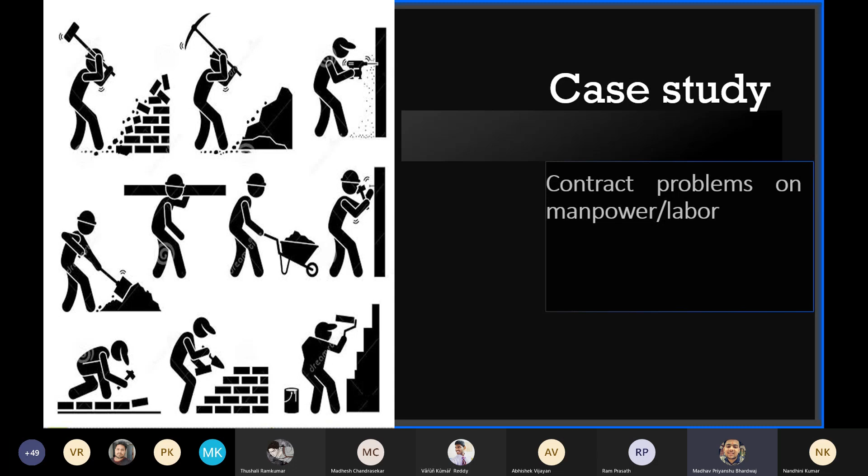The construction industry is the second largest absorber of the bulk of the Indian labor force in the unorganized sector. Construction is one of the principal industries in all countries. Almost all development projects and programs in health, education, food production, and transport require construction work. It was projected by CIA in 2012 that there are 487 million workers worldwide, the second largest after China, with 111 million construction workers, and the majority belong to developing economies like India. This is because employment intensity is much higher in lower income countries than higher income ones.

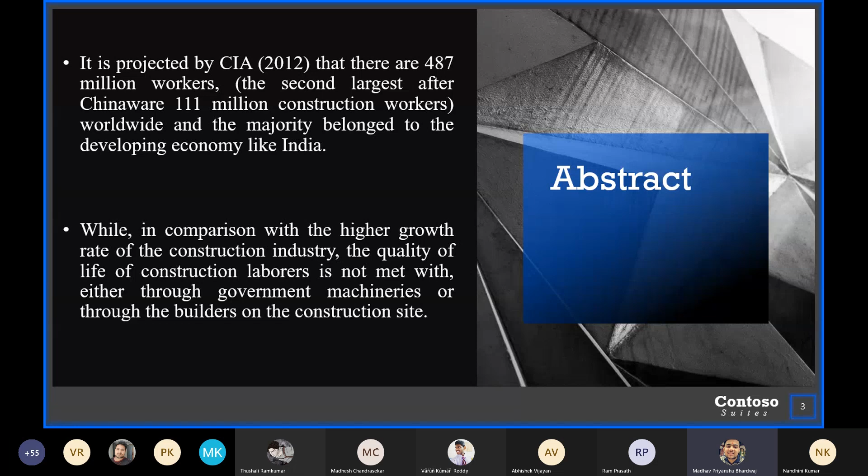In many urban areas and towns in India, an increasing number of workers have taken up construction work as a means of immediate employment, since it assures at least day-to-day sustenance to their 3 to 4 member family's life. While in comparison with the higher growth rate of the construction industry, the quality of life of construction laborers is not met with either through government machineries or through the builders of the construction site.

The present study reveals the physical problems, psychological problems, economical, educational level, work environment, habits, and welfare measures of the construction workers. The outcome of this research will be useful for social workers, general public, government, NGOs, and policymakers. The pathetic condition is that migrated construction workers are constantly exposed to accidents, ill health, extreme levels of harassment, and poor quality of work life.

A study was conducted in Pune city of Maharashtra during the 2010 to 2011 period. The researcher and associates met with construction industry laborers in 82 construction sites in the vicinity of around 70 kilometers of Pune city. The study started with a case study of a male worker on a construction site, and in order to get appropriate support to the qualitative research, a structured questionnaire was also implemented, especially in an informal way. The findings of the case study and the survey questionnaire exactly showed and replicated, exposing the deplorable condition of workers in the construction industry.

This qualitative research paper provides insight into the plight of construction laborers in general, and action to be taken by the authorities, specifically considering the outrageous state of common workers. Now I would like to call upon my friend Tharun to introduce today's topic.

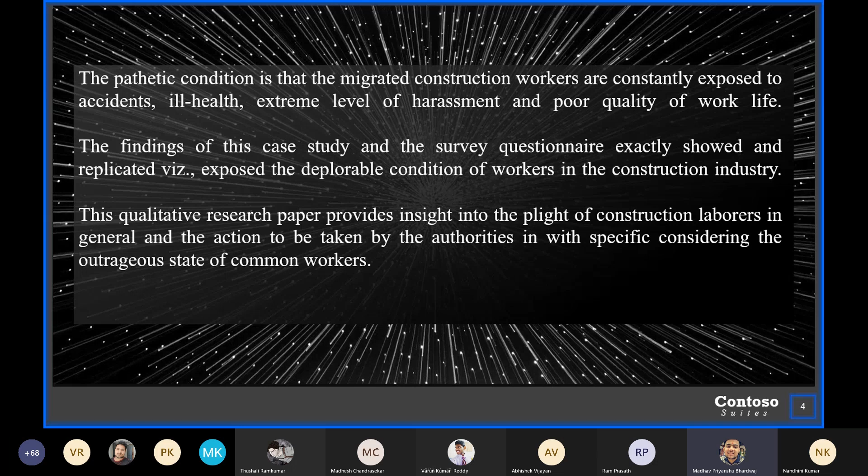Good morning all. Ma'am, am I audible? You're audible. Okay, you're audible, you can start.

Now I am going to give an introduction on this topic. We all know construction worker means workers involved in the process of construction; different groups of workers do different types of work at the construction site. Construction workers in our country are still unorganized, socially, economically, educationally backward, and underemployed, as Madhav said.

These people travel from one area to another along with their families in search of daily jobs. Most of the laborers migrating to big cities have to face a number of problems because of their inexperience and lack of skill, and lack of education makes their choice very limited. They become easy victims of exploitation and have to work for day-to-day sustenance.

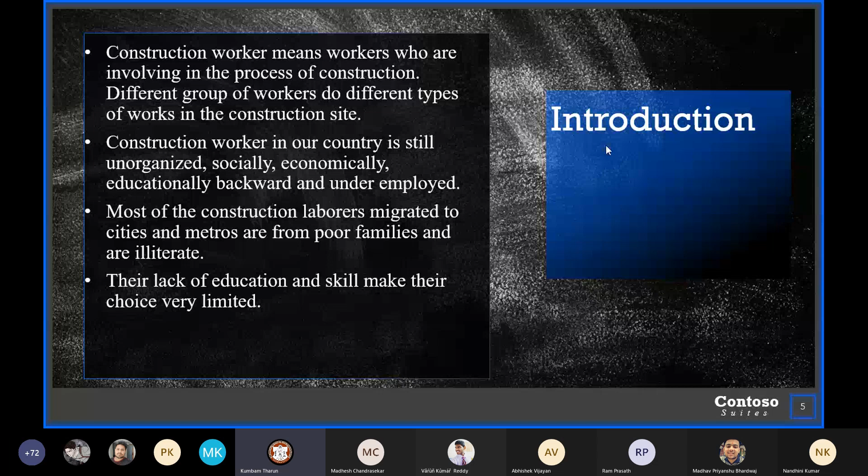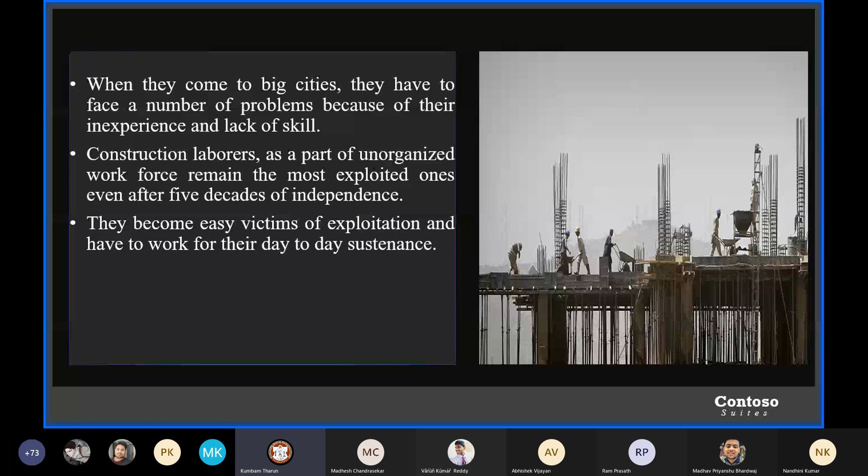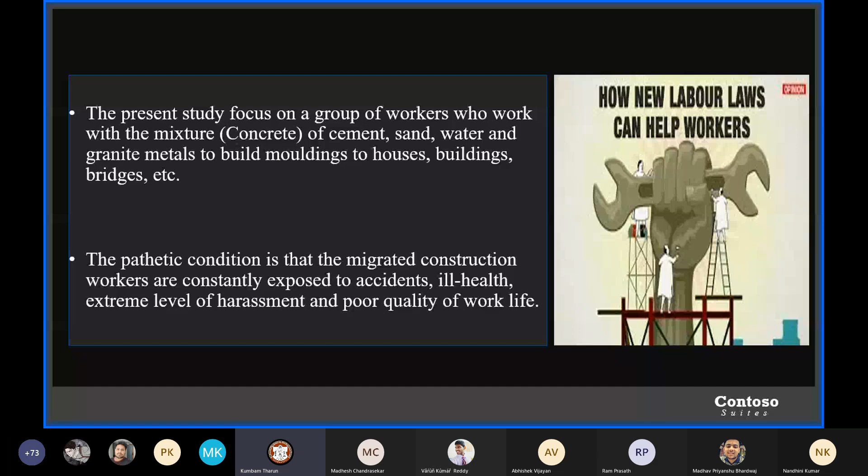The present study focuses on a group of workers who work with a mixture of cement, sand, water, and granite metals to build moldings for houses, bridges, etc. This category of construction worker suffers more than other construction workers because there is no regulated time for work. Every day the workplace is changing, with irregular leisure time, insufficient employment, unregulated wages, and some are exposed to accidents and ill health due to poor quality of work life.

At present, there are more than 20 million construction workers in India. Cities like Delhi alone have around more than 600,000 of them. Apart from other metropolitan cities, lack of employment opportunity has drawn a large number of workers into this sector, as part of the unorganized workforce that remains the most exploited ones even after 5 decades of independence.

In the recent past, the trend shows that big cities have become the center to recruit casual labor as construction laborers for sites and urban areas. This seeks to look at the employment of labor in the construction industry in less developed countries from these two perspectives. A review of literature reveals that this is now the predominant form of employment in the construction industry of developing countries. Now Padmasri will continue on the review of literature.

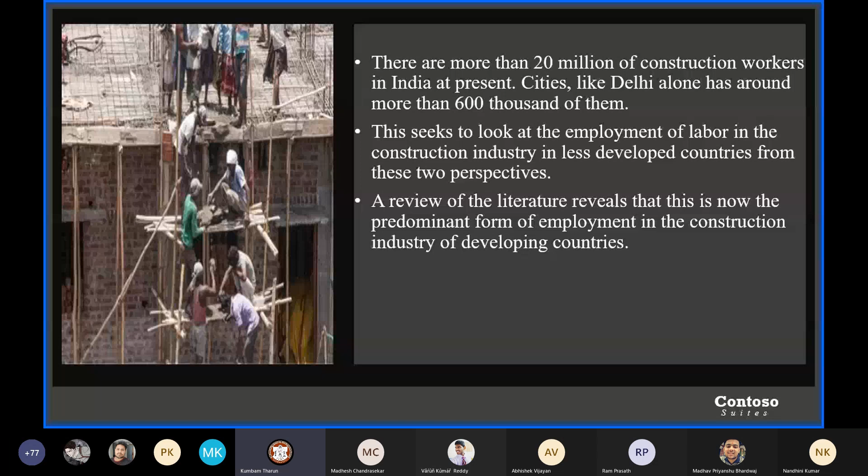Now I am going to present the review of literature. Construction is one of the principal industries in all countries, which has its own unique characteristics and contributes to overall development progress.

All development projects and programs in the field of education, health, food production, etc. require construction work. Construction workers are broadly classified as skilled and unskilled workers. Unstable employment or earnings and shifting of workplaces are the basic problems of construction workers.

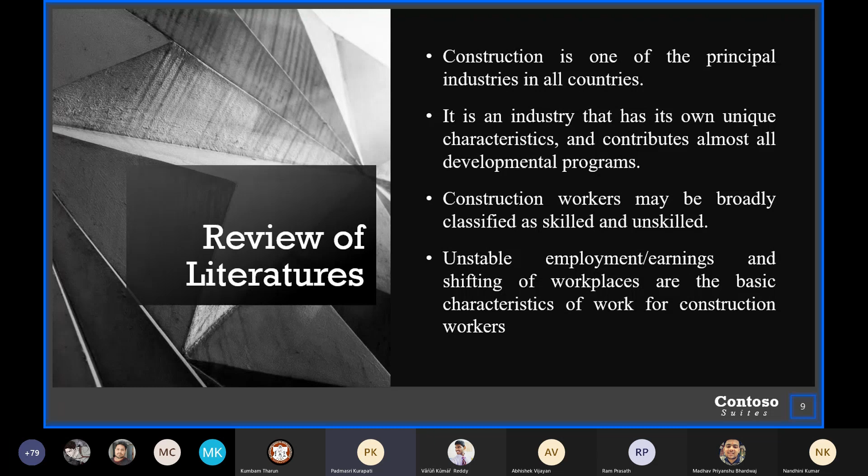Many surveys reveal that female workers do in general get minimum wages. Skilled workers secure jobs directly from employers, but unskilled workers are engaged through intermediaries who introduce them to contractors on a commission basis. The payment of wages is also routed through the intermediaries, who usually enroll workers by offering loans. These loans are then recovered by manipulating the wages of the workers, with the result that the worker hardly gets out of the clutches of the intermediaries.

Construction workers constitute the second largest category of workers in the unorganized sector. There are more than 17 million building and other construction workers in India as per estimates of the National Sample Survey. A large number of multinational and local companies employ lakhs of workers in construction and other activities like whitewashing, painting, plumbing, and fixing electric fixtures.

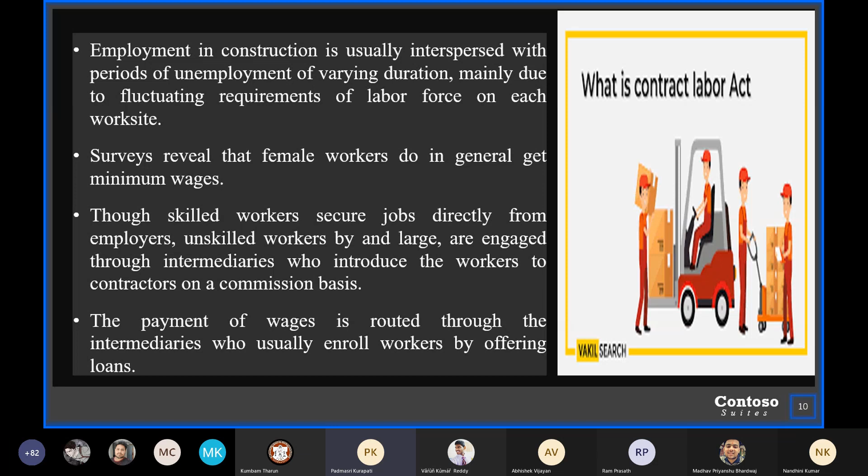Construction workers come under the classification of the unorganized sector. Unorganized sector workers suffer from cycles of excessive seasonality of employment, no formal employee-employer relationship, and lack of social security protection. Several legislations are directly or indirectly applicable to workers in the unorganized sector. The government has launched schemes for people living below or marginally above the poverty line, which include workers in the unorganized sector.

The living conditions of construction workers in our country are poor and inhuman. They live in groups and their houses are constructed with scrap material from the construction site. There is no proper arrangement for waste disposal or sewage supply, causing environmental pollution, and there is unavailability of health, medical, and educational institutions, and lack of good quality food and nutrition.

These are the problems faced by construction workers. Daily wages differ according to the status of the worker and work efficiency, and are highly associated with skill status. The per day net average earning of construction workers is very minimal.

Majority of the workers are migratory in nature and have to depend on labor agents to confirm job availability. Some labor laws introduced in the construction industry include the Contract Labor Act 1970, Interstate Migrant Labor Act 1979, Building and Construction Workers Act 1996, and Building and Other Construction Workers Welfare Cess Act 1996. These are about regulation and protection of workers.

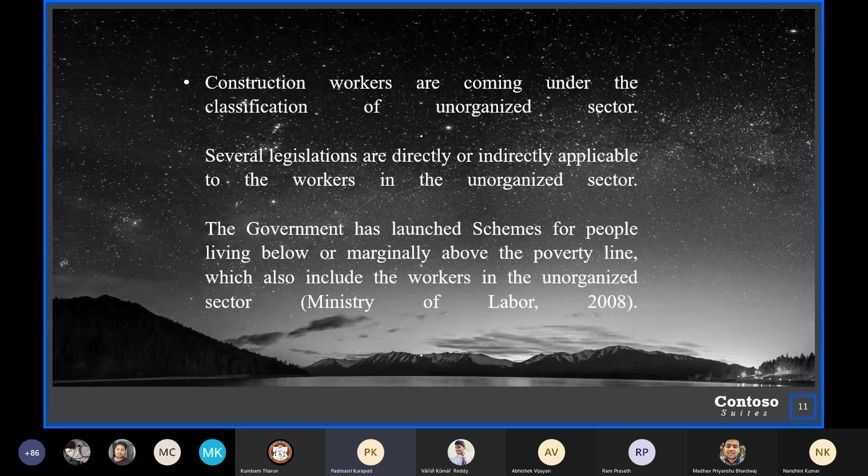Though construction workers have been given a lot of protection rights, in real life they are facing many difficulties to meet their basic needs. Now I hand over the presentation to Lokesh, my teammate.

Hello, am I audible? Hello. Yes, you're audible. Yeah, you're audible.

Hi everyone, I am Lokesh, roll number 67, and I am here to discuss the objective of this study. Our general objective is to study the problems of construction workers at Tirupattur, and the specific objectives are to study the physical, psychological, and economic problems of construction workers.

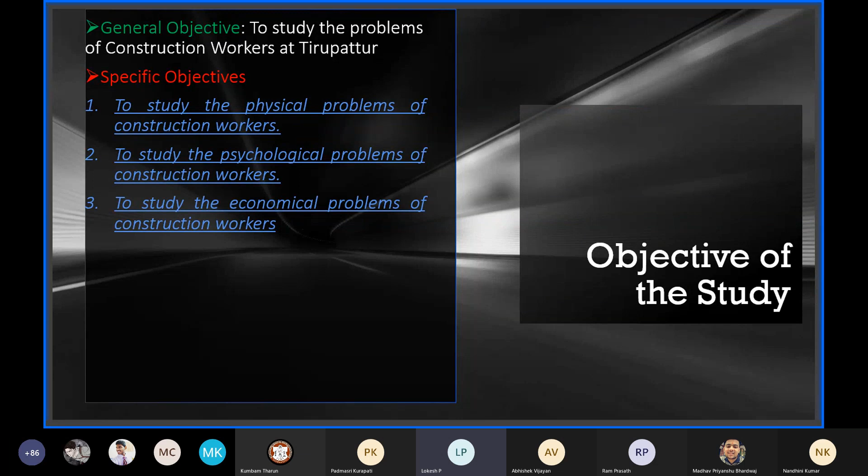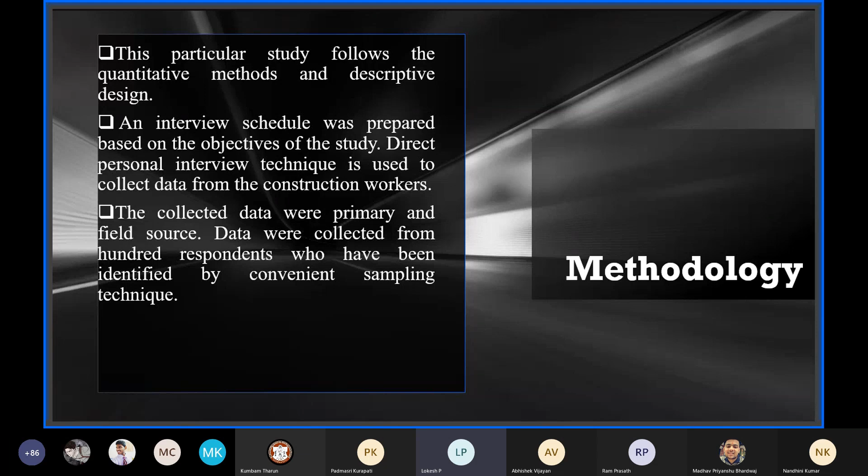Next slide. Here we have the methodology used to find the problems. This study follows quantitative methods and a descriptive design, with an interview schedule based on the objective of the study. Direct personal interview technique is used to collect data from the workers. The collected data were from primary and field sources. The data were collected from 100 respondents identified by a convenient sampling technique.

Next slide. And here we have the main findings. The construction industry is not providing basic facilities and safety measures to workers on site. As mentioned previously by Tharun in the introduction, 70% of the construction workers are living at town, and 82% of the construction workers get employment 2 to 4 days in a week.

The average minimum working hours in a day is 4.91 hours, and the maximum working hour in a day is 11.12 hours. 28% of construction workers get less than half an hour for rest during work, which includes lunch time also. 62% of workers never get lunch during work, but they are paid around rupees 50 to 60 for lunch, which is added to their wage.

74% of the construction workers are affected physically due to the nature of the work. Among them, 60% suffer due to body pain, 46% due to chest pain, 32% due to injury, 28% due to eye problems, and 18% due to skin problems.

52% of the construction workers have unfavorable habits such as drinking 26%, smoking 32%, pan consuming 12%, tobacco consuming 10%, and betel leaves chewing 4%.

86% of the population is suffering from psychological problems due to the nature of the work: lack of workability 54%, height of the workplace 40%, change of work time every day 30%, change of workplace every day 26%, lack of toilet facility 6%, work under compulsion 18%, lack of transport facility 10%.

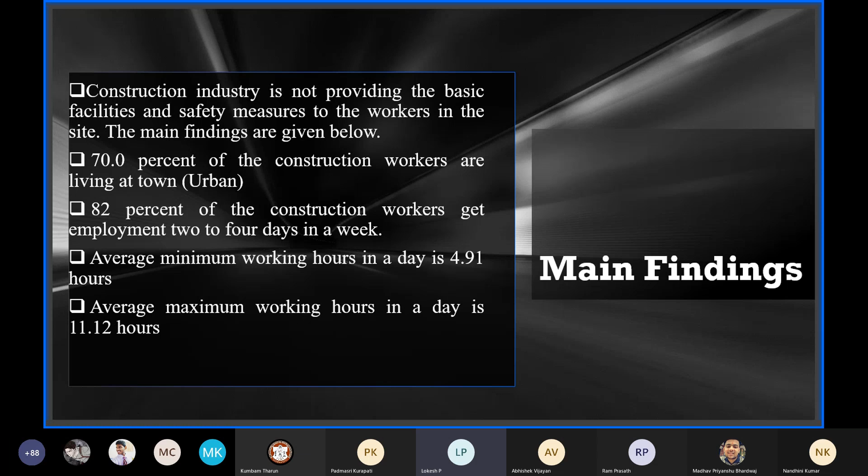42% of the workers are living in hut houses. The average minimum wage of the worker is rupees 145 only, and the average maximum wage of the worker is 250.

64% of the workers have no saving habits. 84% of the workers have loans, of which 80% have loans from the private sector. 44% of the workers have taken loans to meet the daily needs of the family, and 60% of the workers pay more than rupees 8 as interest for their loan per month.

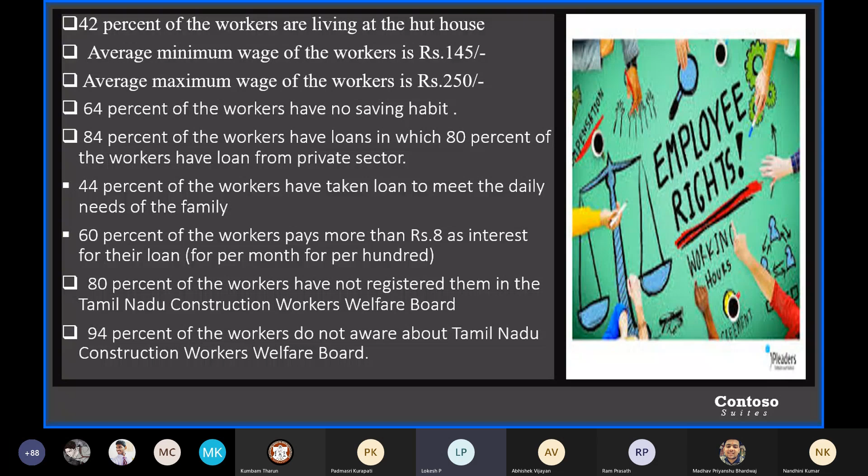80% of the workers have not registered in the Tamil Nadu Construction Workers Welfare Board, and 94% of the workers are not aware about the Tamil Nadu Construction Workers Welfare. That's all my part. Now my friends will conclude this.

Hello, am I audible? Hello? Hello? Am I audible? Yes bro, hello, am I audible? Yeah, you're audible. Yeah Prince, you're audible, you can start it.

As my friends have told before, the objective of this quantitative research is to explore the problems of construction laborers in India, constituting an important segment of the overall service industry, 7% of total GDP, and recording an annual growth of over 10% over the last 5 years.

The construction industry is one of the biggest employers of labor in India. While the condition of workers in the construction industry is very much deplorable, neither the law nor the contractors are showing mercy to this socially and economically poor segment of the population.

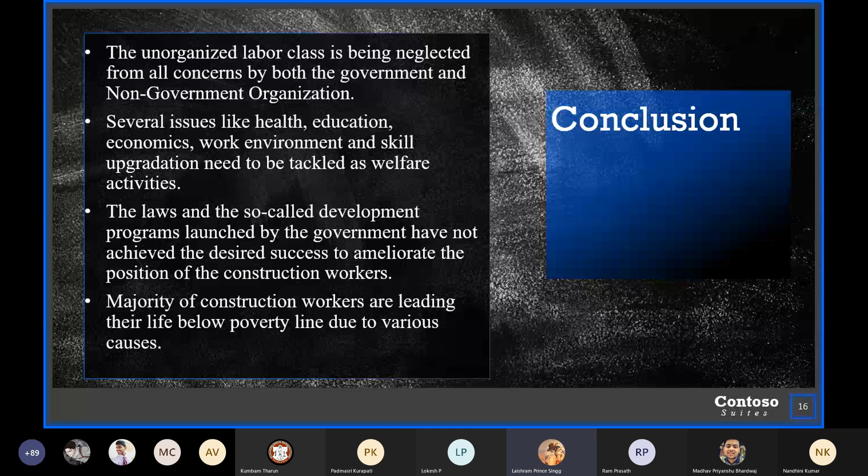The majority of construction workers are leading their lives below the poverty line due to various causes. The struggle for better wages and better working conditions cannot yield results only by formation of trade unions or cooperatives. Thus, a viable and workable solution must be evolved.

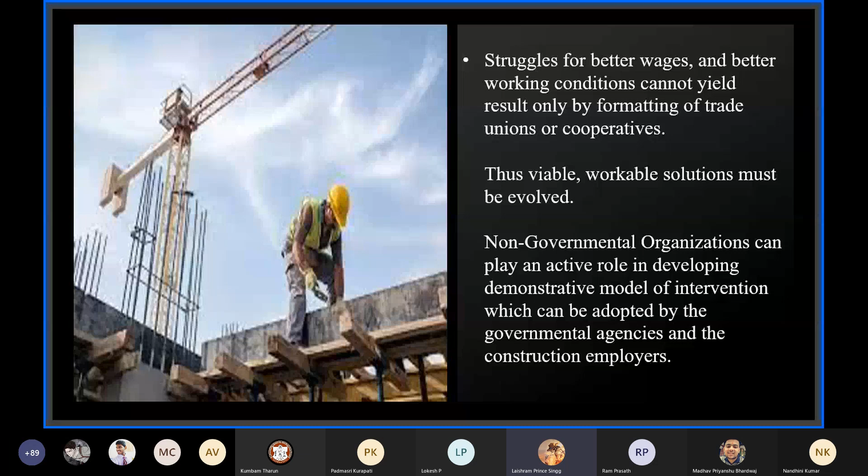Non-governmental organizations can play an important role in developing a demonstrative model of intervention which can be adopted by government agencies and the construction employers. With this, we are winding up our presentation, and given below is the reference we took during the case studies. Thank you, everyone.

Okay, thank you Team 13 members. This was a case study on construction laborers where you have discussed the problems they are facing in day-to-day life financially, and the issues they are facing in the construction sectors.

Yeah, this is sufficient for the case study. We won't be able to put so much because as it comes under case study, you have to take a journal, either a journal or literature or any textbooks, and just mention what issues they are facing and why. That you have discussed very well. Very good presentation overall, thank you.

Thank you. Yeah, thank you. Students, do you have any doubts on this topic? Case study on construction laborers or employees. Do you have any doubts?

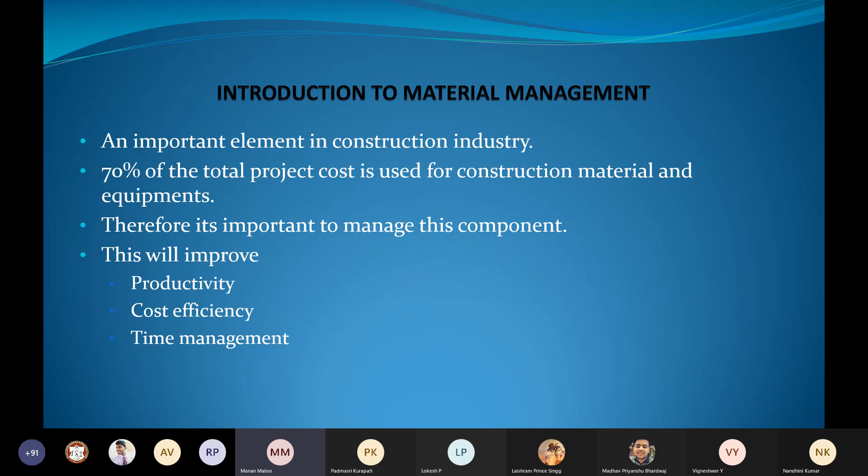Before we directly jump to our case study, it's better to first understand about the material and its management and its importance.

For managing a productive and cost efficient site, efficient material management is essential. Research has shown that construction material and equipment may constitute more than 70% of the total cost for a typical construction project. Therefore, management of this single largest component can improve the productivity and cost efficiency of a project and also help ensure its timely completion. One of the major problems in delaying construction projects is poor material and equipment management.

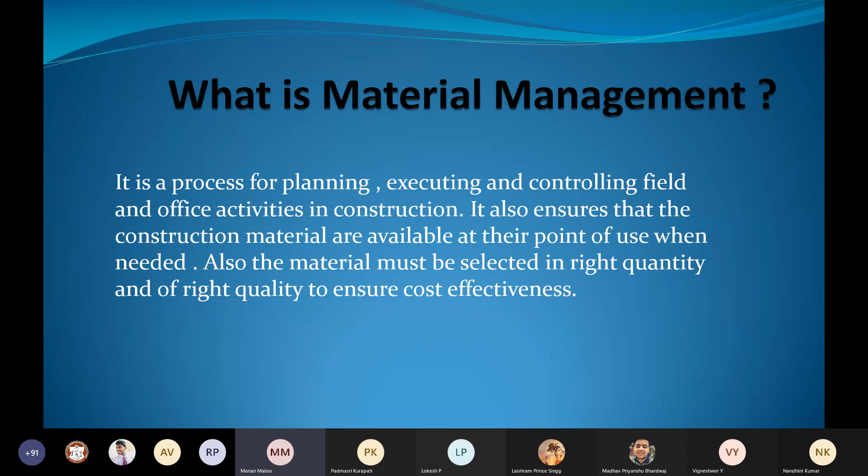So here comes the important question: what is material management? Material management is a process for planning, executing, and controlling field and office activities in construction site. The main goal of material management is to ensure construction materials are available at the point of use when needed. The material management system ensures the right quality and quantity of material are appropriately selected, purchased, and delivered on site in a timely manner, and are obtained at a reasonable cost, and most importantly are available at the point of use when needed.

Components of material management are material estimating, budgeting, and planning. It is important to plan activity so that it is easy to estimate the amount of material, and as a result an approximate budget can be prepared and further planning can be done.

Scheduling, purchasing, and procurement. After estimating and planning, it is important to schedule the process of construction so that the schedule of purchasing of material can be prepared, because without a proper purchasing schedule, it may happen that we purchase material that will not come into use right away. This creates a problem of storage, and due to insufficient storage, some material left in open space may be stolen or may become useless or get damaged due to rain or other natural reasons.

Receiving and inspection. At the time of purchasing material, it must be inspected for proper quality, and also at the time of receiving, it must be inspected again for proper quality and quantity, since quality of the material determines the quality of structure.

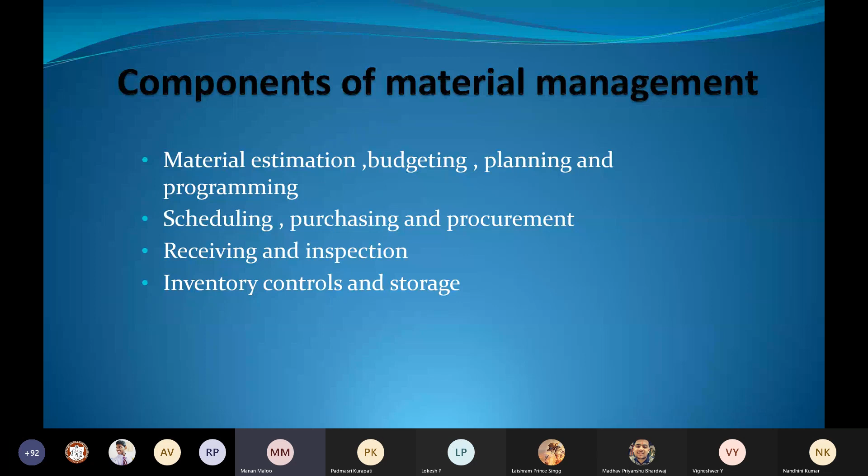Good morning, all. I will be discussing a case study on the flyover at Nashik on NH3.

This is an example of a lump sum contract. The work has been awarded to L&T, and the agreement is signed with L&T and PNG Tollway on 8 July 2009. The construction period is around 30 months. The project involves construction of a 5.5 km long, 4-lane flyover. This is India's first externally prestressed segmental box girder. It consists of 172 pillars with 12 segments each, which sums up to a total of 2064 segments. The cost is 940 crores and the expected lifetime is up to 100 years.

Problems faced and the need to construct: higher rate of accidents, high traffic problems at major intersections such as Dwarka and Mumbai, to reduce the time for vehicles passing over the flyover.

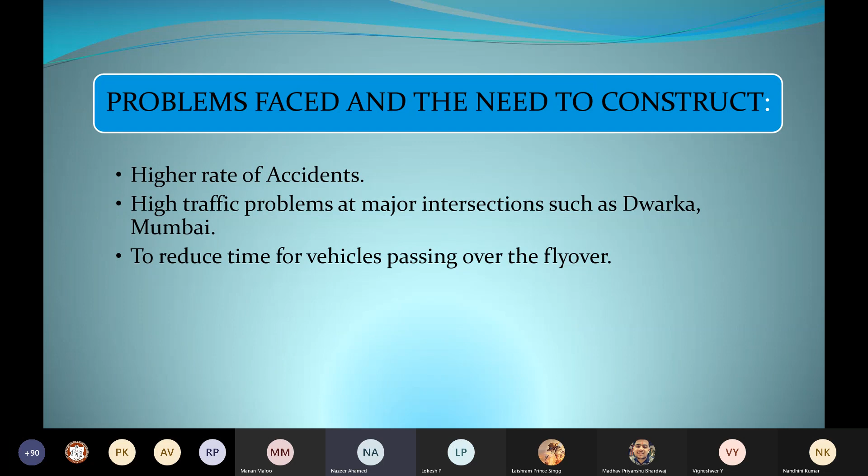Materials: foundation, piers, and segments. The concrete used is M35 grade and the concreting work is done by the time method. For foundation, the selection of type of foundation depends on the standard penetration number, following the standard penetration test as per the contract. Open foundation and pile foundation are used. If the span is greater than 50, open foundation is used; otherwise, if it is less, pile foundation is used.

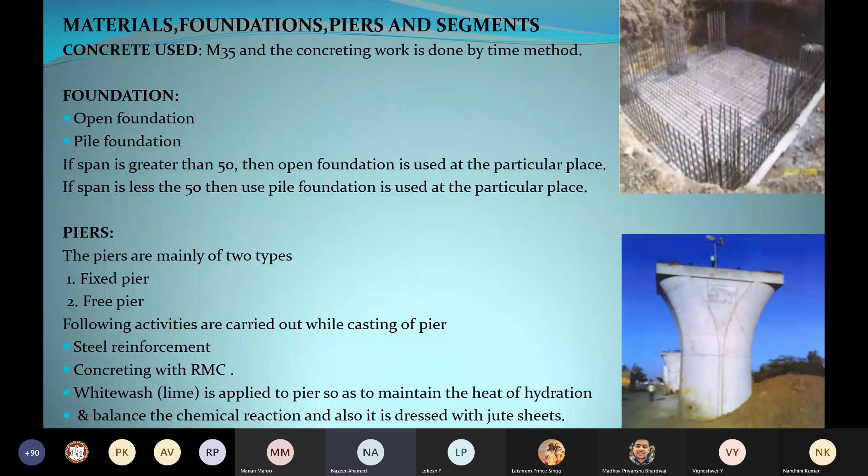Following activities are carried out while casting a pier: steel reinforcement, concreting with RMC. Whitewash is applied to piers to maintain the heat of hydration and balance the chemical reactions, and it is also covered with jute sheets.

According to the contract, trees should be planted when they are cut. But as usual, many trees were cut during the project and no records of planting were found. So the project cost went from 940 crores to over 1000 crores.

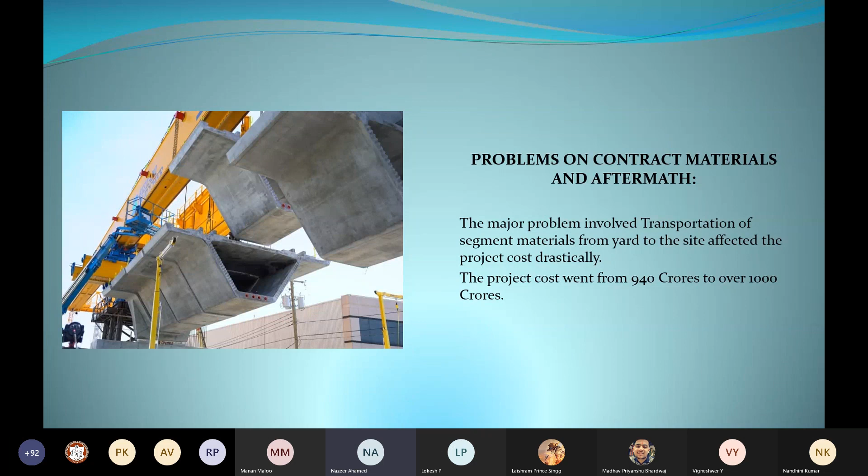Thank you. Next, Madhesh will continue on a case study of Nairobi, Kenya.

Hello all. I'm going to tell about a case study on contract problems and materials at Nairobi in Kenya.

The major problems are availability of materials, wastage of materials, quality and surplus of materials. The first is availability of materials. Materials availability was investigated, looking at storage problems, work being delayed, suspended, stopped, or working time extended due to shortage of materials or emergency purchase of materials. These are presented in the following tables.

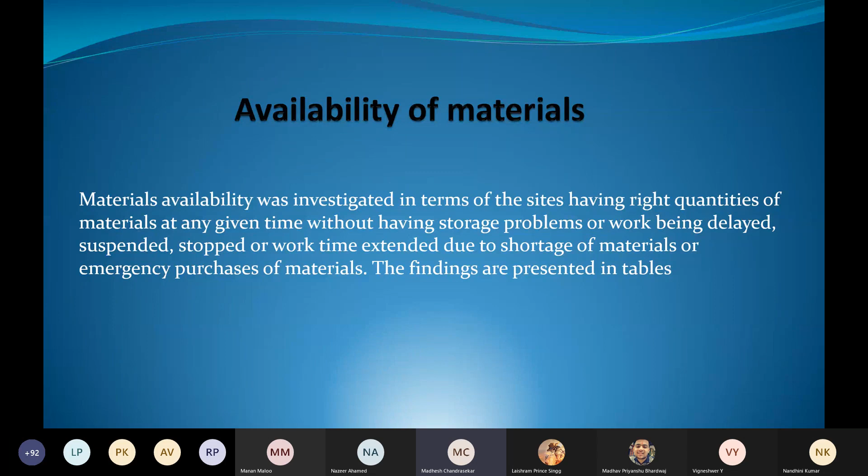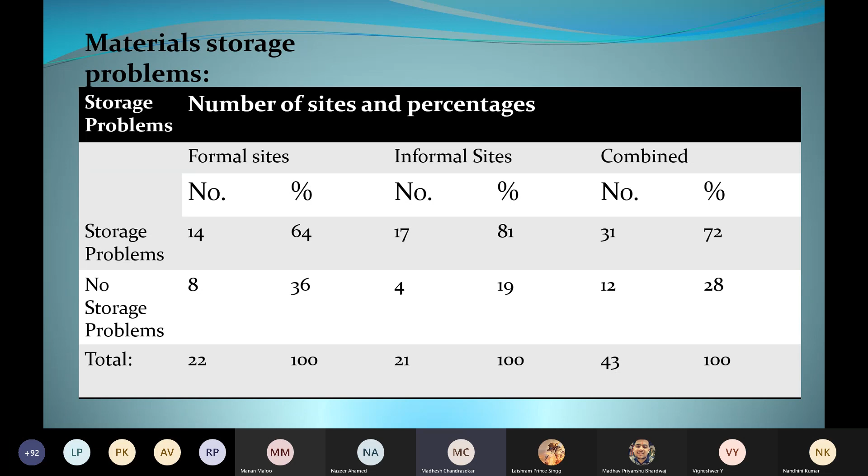So in this table, we can see storage problems in both formal sites and informal sites, and combined, whether there are storage problems or not.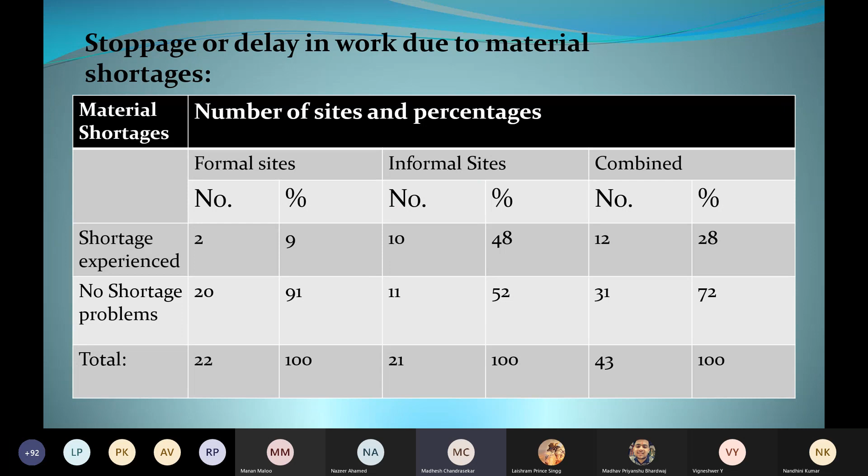This table presents detail about whether shortages are experienced or not in both formal sites and informal sites.

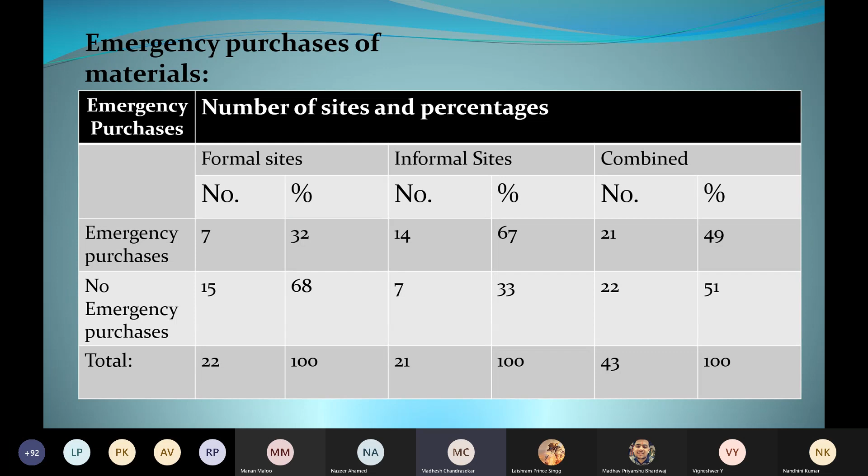In this table, emergency purchases are briefed here, whether there are emergency purchases or not.

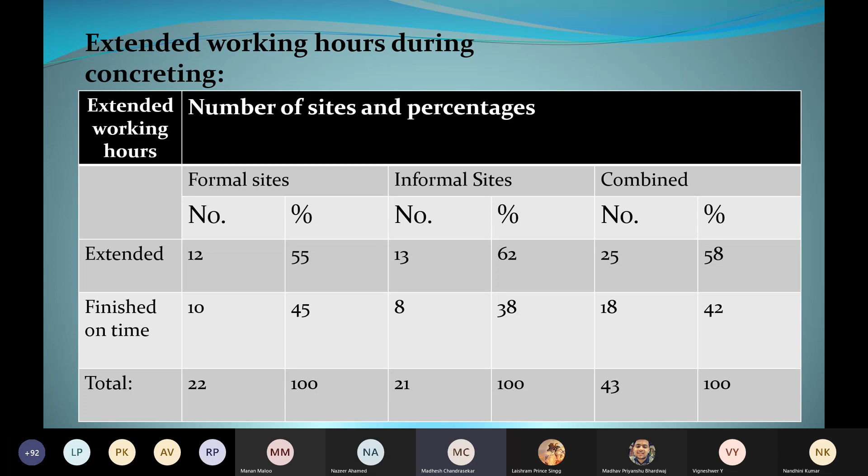From the above tables, we can see that most sites experience some form of storage problems for materials, with 64% in formal and 81% in informal sites. Material shortages were experienced mostly on informal sites at 48%, and only 9% in formal sites. Regarding emergency purchases, both formal and informal sites were involved at considerably high rates of 32% and 67%.

Regarding extended working hours for concreting works, this was prevalent on both formal and informal sites at 55% and 62% respectively.

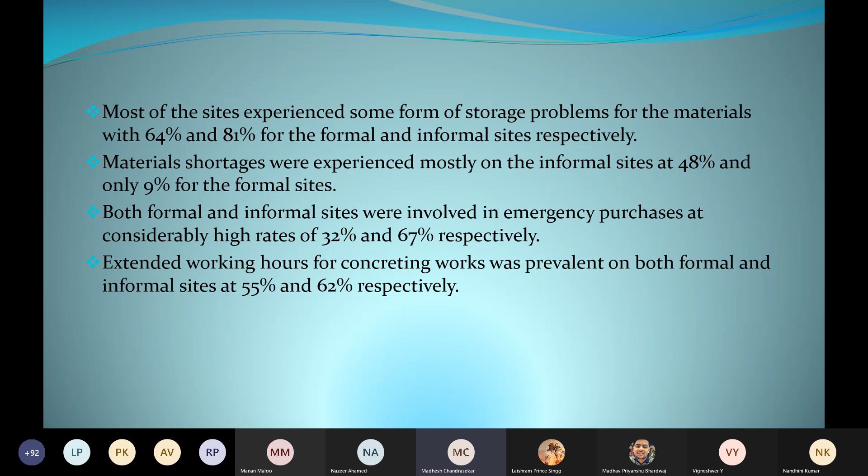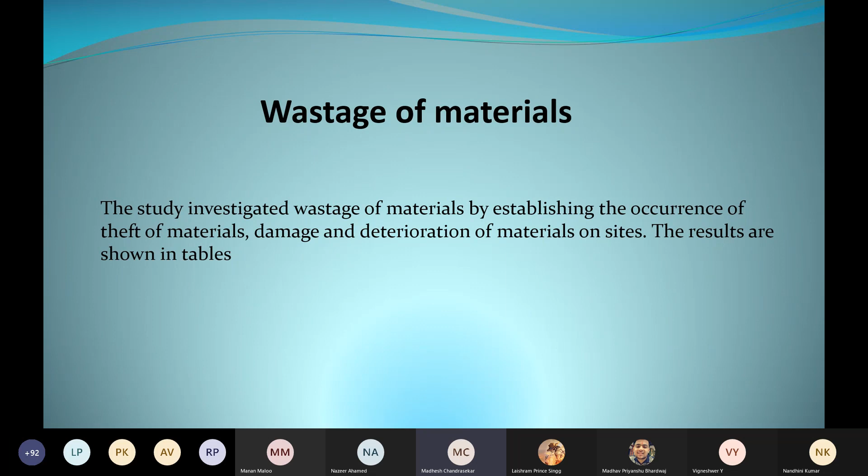The next problem is regarding wastage of materials: the occurrence of theft of materials, damage and deterioration of materials on sites. The results are also shown in the following tables.

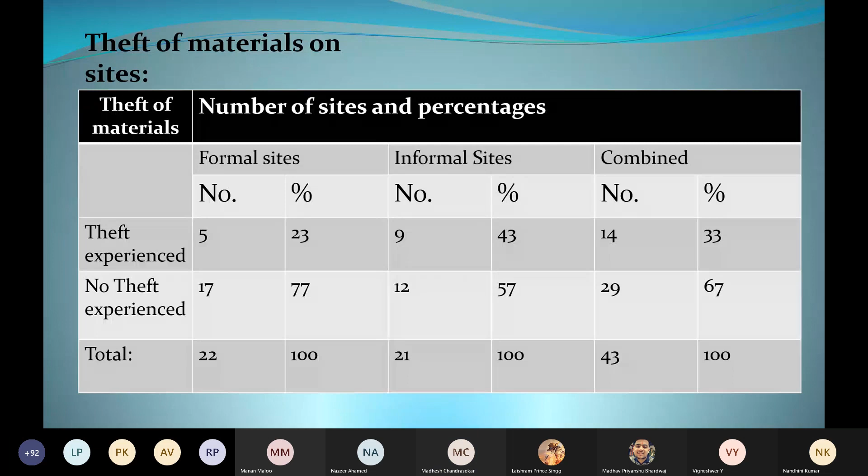Theft of materials was fairly high on informal sites at 43%, compared to 23% for formal sites, while damage and deterioration was fairly low at 24% and 18% for informal and formal sites respectively.

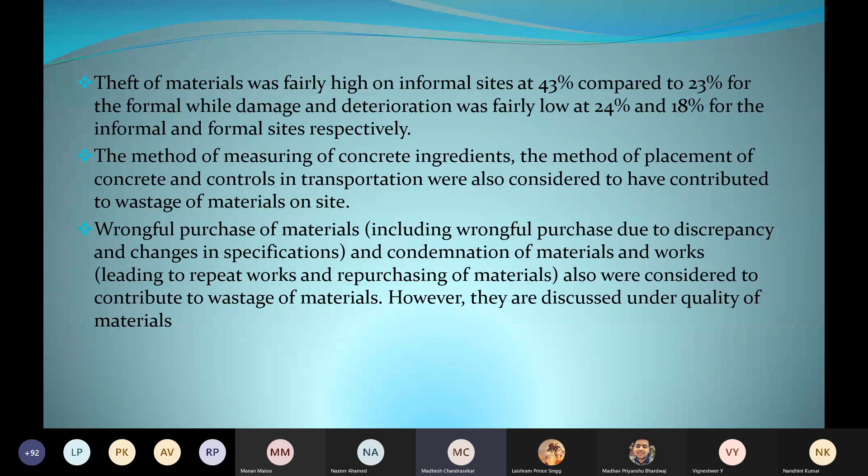Regarding wastage of materials, the method of measuring concrete ingredients, the method of placement of concrete, and controls in transportation are also considered to have contributed to wastage on site. Wrongful purchase of materials and condemnation of materials are also included in wastage of materials, but we will see this in the quality of materials in coming slides.

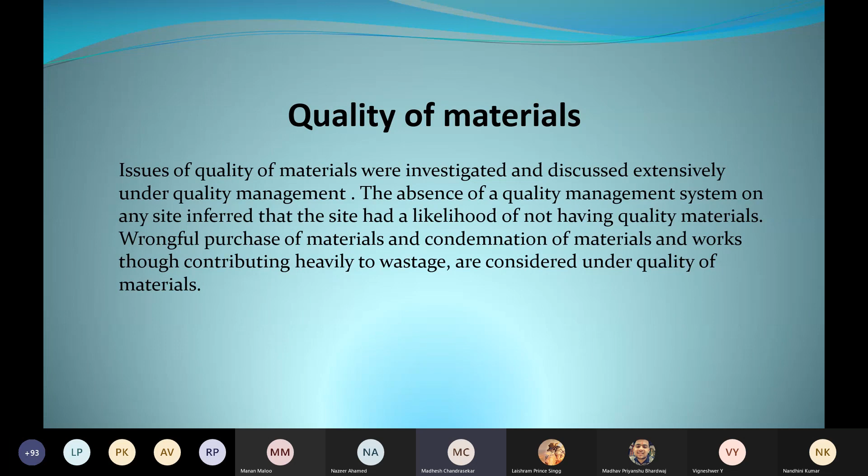The third problem is quality of materials. The absence of a quality management system on any site inferred that the site had a likelihood of not having quality materials. As discussed above, wrongful purchase of materials and condemnation come under this. In this table, it is briefed about wrongful purchase at construction sites, whether it's experienced or not in both formal and informal sites.

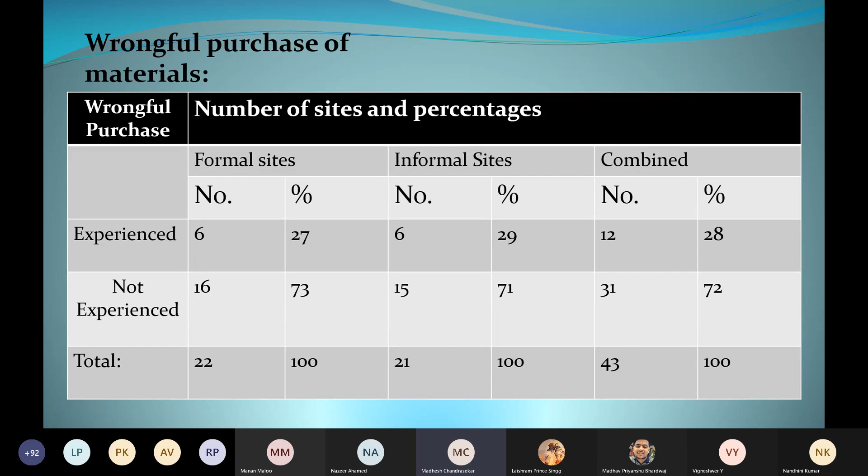This table presents the condemnation of materials and works, whether it's experienced or not experienced in formal and informal sites.

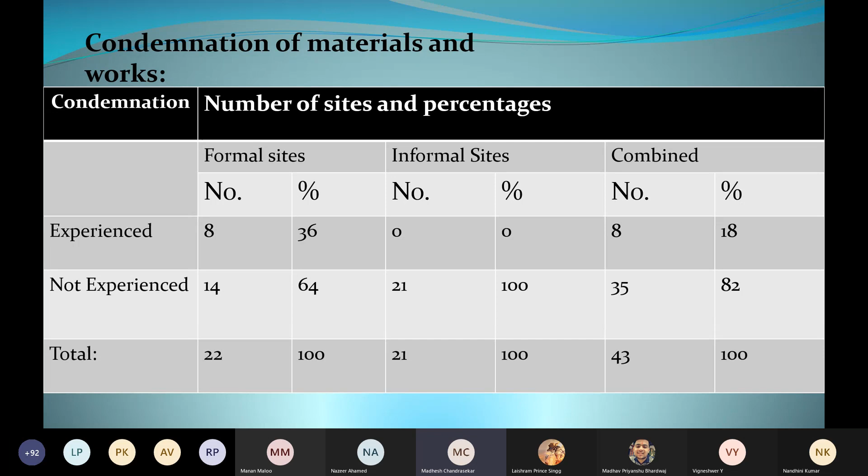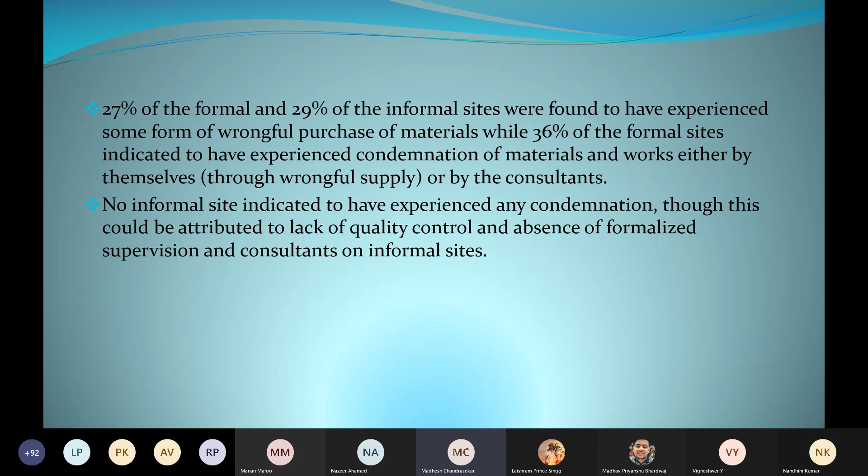From the above tables, we can say that only 27% of formal and 29% of informal sites were found to have experienced some form of wrongful purchase of materials, while 36% of formal sites indicated experiencing condemnation of materials and works, either by themselves or by the consultants. No informal site indicated experiencing any condemnation, but this is due to the lack of quality control and information regarding it.

The third main problem to the customer is surplus of materials. Surplus of materials was mainly experienced on formal sites at 91%, while on informal sites it was just 52%.

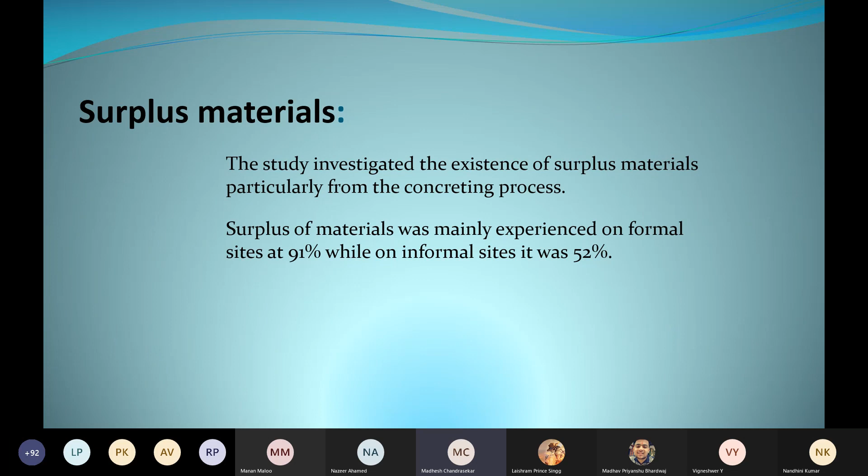You can see whether the surplus is experienced or not in this table, for both formal and informal sites.

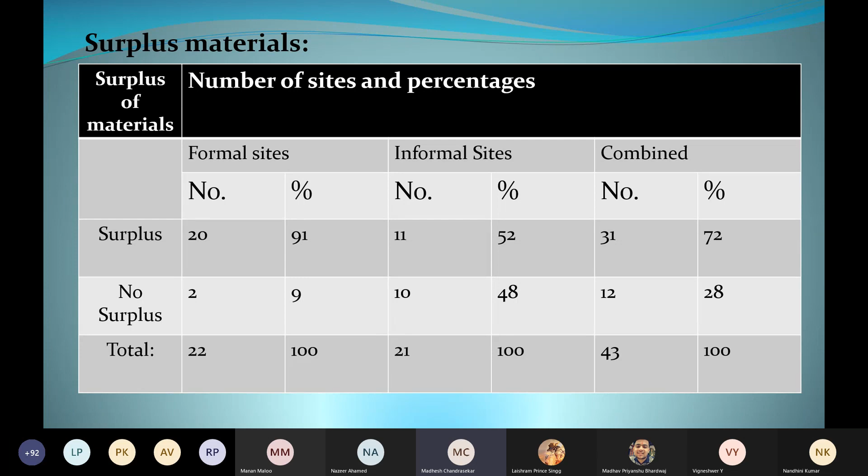These are the causes of surplus. The first is deliberate over ordering, then overestimating. Sometimes the design may change, which is also a cause of surplus. And the last one is no surplus or shortage.

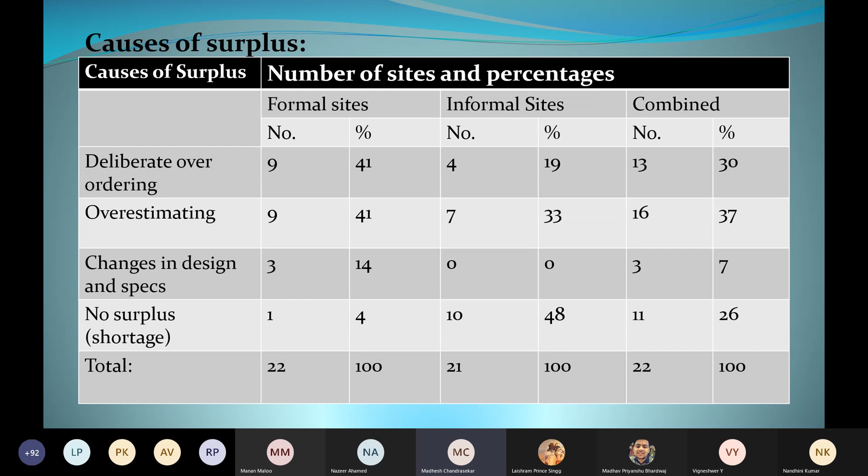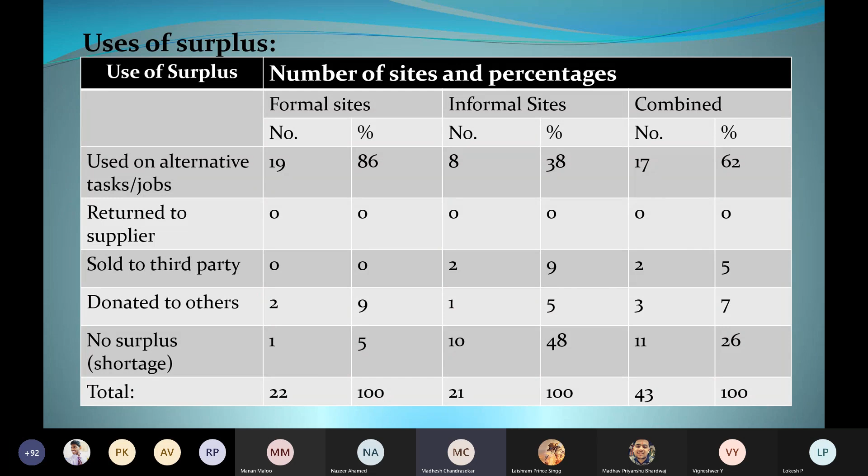Regarding surplus, they are also used for many purposes so that they are not wasted totally. Some are used on alternative tasks or jobs, some are returned to a supplier, and some are sold to a third party or donated to others, like that.

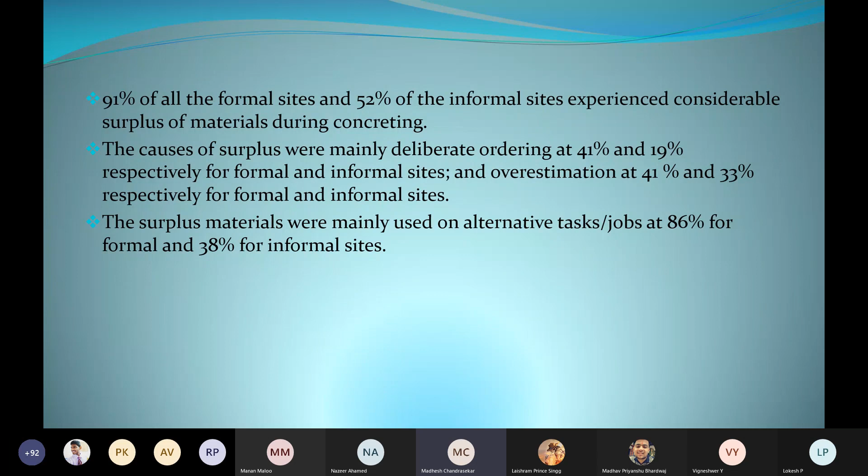Now Manoj Kumar will continue.

Hello everyone. Case study on contract problems related to material at Palestine. Analysis of problems related to material.

The problems related to specification and material adaptation are represented in a bar diagram, allocating the importance distribution of responses and their percentage. The results show that the weakness of the Palestinian Standards Institution's role is the most important problem among those related to specification and material.

Interviews with a number of contract parties in the study sample indicate that the lack of Palestinian specifications for material and equipment to be adopted in projects leads to consultants showing diversity in describing the BOQ according to their own experience.

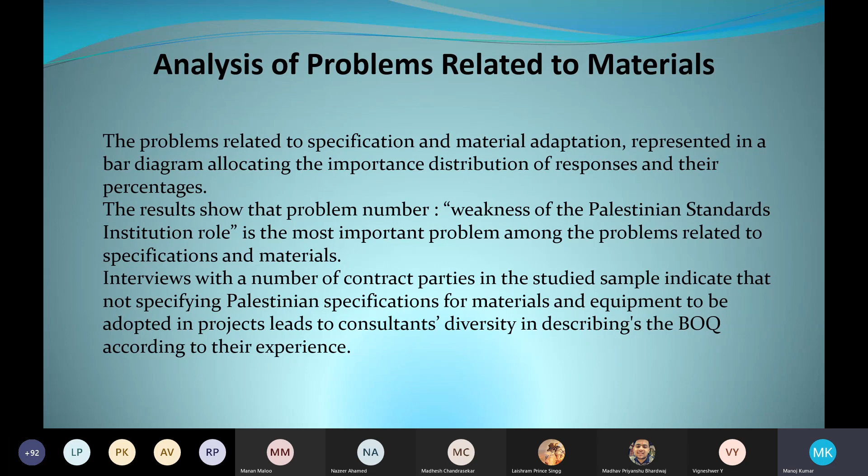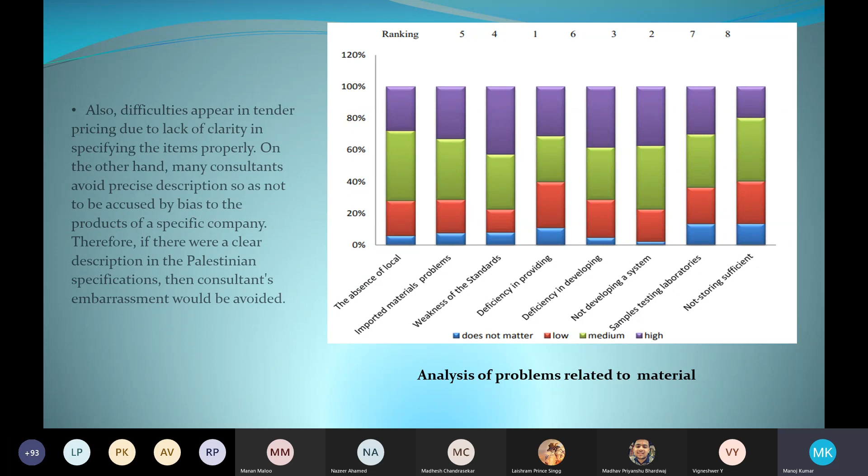Also, difficulties appear in tender pricing due to lack of clarity in specifying the items properly. On the other hand, many consultants avoid precise descriptions so as not to be accused of bias toward the products of a specific company. Therefore, if there were very clear descriptions in Palestinian specifications, consultants' embarrassment would be avoided.

Next slide. Next slide.

Based on the result of statistical data processing of the questionnaire, we can see the impact of material management in a sequence based on ranking, the mean, and standard deviation.

The description of the impact of material management, with rank given, is as follows: becoming longer time, average 4.21; increased cost of construction, average 4.15; use of construction equipment becoming inefficient, average 4.12; regional economy, average 3.90; inhibiting the progress of regional development, average 3.87; delay in procurement of material impacting quality of construction, average 3.46.

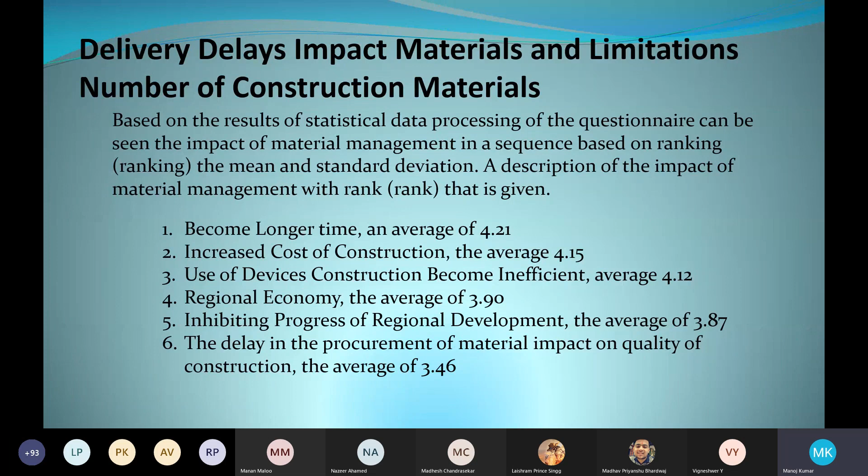My name is Manoj, roll number 103119072. I'm going to do a case study on a public sector building construction which was constructed under an EPC contract, started in 2017. Can I have the next slide, please?

It was estimated to have a budget of 100 crores. EPC contract stands for Engineering, Procurement, Construction. In EPC, the contractor is responsible for design, preparation of engineering drawings, construction, testing, commissioning, and meeting owners' requirements.

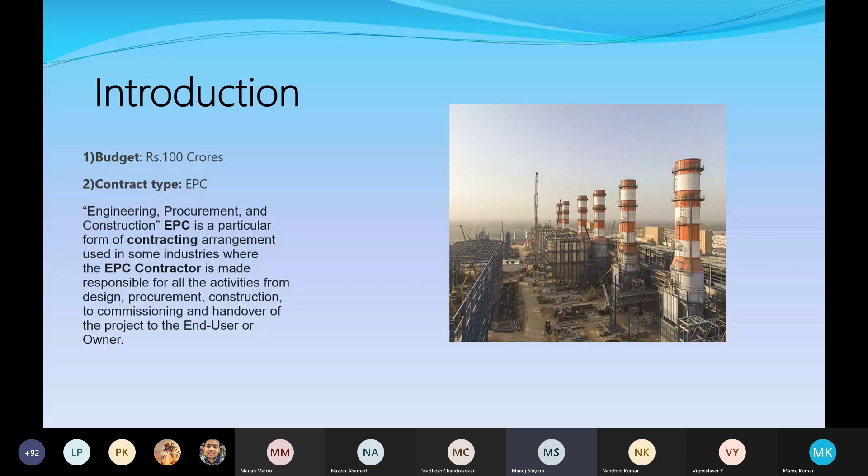EPC contract gives a fixed contract price, a fixed completion date, and security, which is why it's so popular. Can I have the next slide, please?

The success rate of EPC depends mainly on finance, risk analysis, and contract regulations. These two factors depend on pre-feed and feed studies, which normally take one year.

FEED stands for Front-End Engineering and Design, and is conducted after completion of the design. At this stage, various studies take place to find technical issues and estimate the investment cost. For a successful feed study, the feed estimated investment cost should be more than the actual cost.

Some organizations don't see the value of feed and minimize their feed investments, but by minimizing this step, they cannot accurately get information about the project. In this case, after the survey, it was concluded that the feed studies were at very high risk.

So the next is approvals, meaning planning permissions and statutory approvals. In this project, it was also done very badly, so there were many constraints, like they were not able to cut the trees.

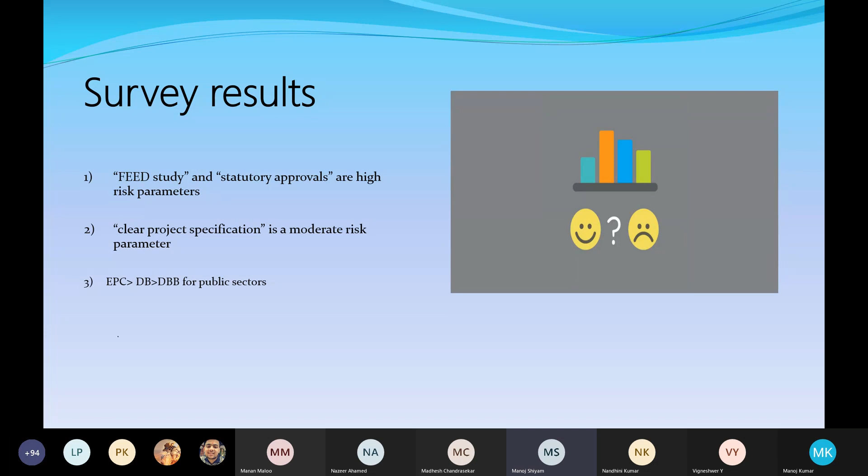Okay, so why is this project considered a failure? The EPC contract provides a fixed completion date and a fixed contract price.

The duration was 6 months for the engineering phase, which includes planning and taking approvals. The next 2 years were allotted for the construction phase, and the next 2 years were allotted for maintenance of the project. So the total estimated time was about 4.5 years, to be completed by 2021.

But the project is already more than 1 year behind schedule, so it's expected to be completed by 2022. Can I have the next slide?

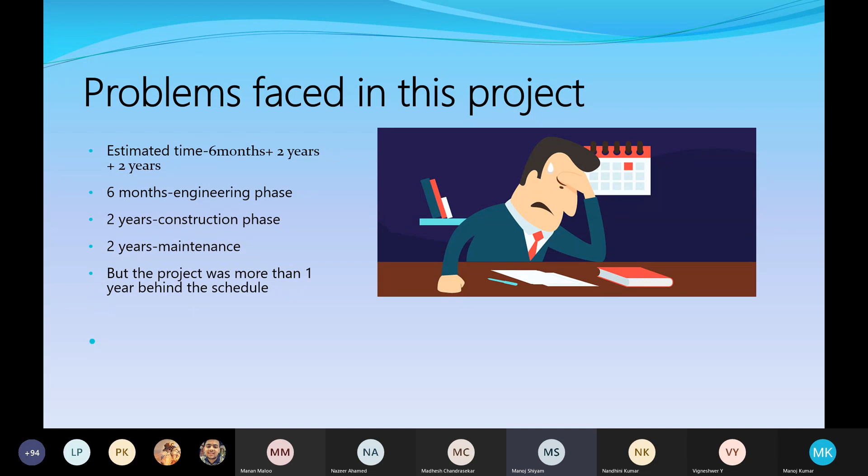The project issues involved were listed below. Delay in tree cutting approvals - the EPC contract does not allow cutting trees, so approval for cutting trees was not given. But there were about 349 trees in which 109 had to be cut.

So they had to revise the design to reduce the number of trees to be cut. All the approvals were taken again for the new design, and it took 6 months to change the plan.

Due to the change in plans, there was a change in price, but EPC follows limited investment. There was a shortage of funds, thus a shortage of construction materials. Due to EPC contract terms and conditions, the management of materials became inefficient.

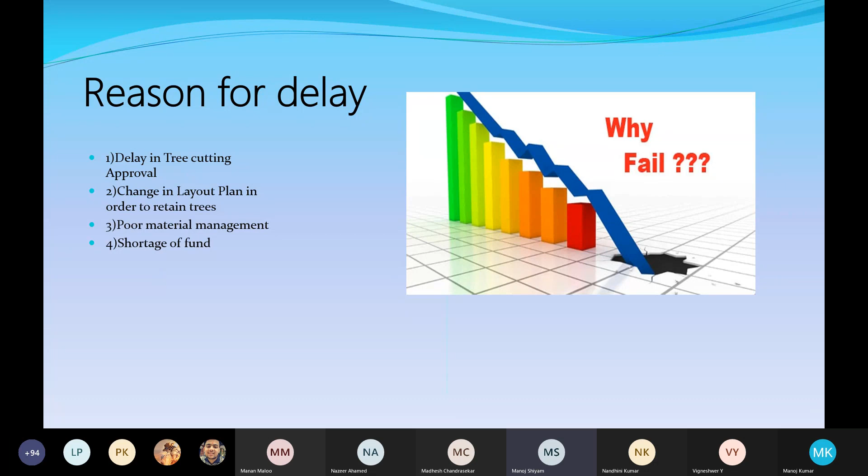Okay, so the presentation was very good. Now I have two questions to raise to Nazeer and Madhesh, who were dealing with the case studies. Nazeer, you explained the NH project - what are the final outcomes you are about to tell in that particular case study?

Yes ma'am, what problems they faced and how they overcame them. Can you explain that in a couple of words? Ma'am, the problem they faced was regarding the transportation of segments.

They expected that the project would cost around 940 crores, but it went over to 1,000 crores. And how did they deal with it? It would be good if you suggest something about how they dealt with it.

Since it's a lump sum contract, it is considered a disadvantage, so they cannot overcome the financial case. Such cases, you should go for lump sum contracts - is that what you're saying, that it is considered a disadvantage for lump sum contract? So that case study shows a disadvantage for the lump sum contract type.